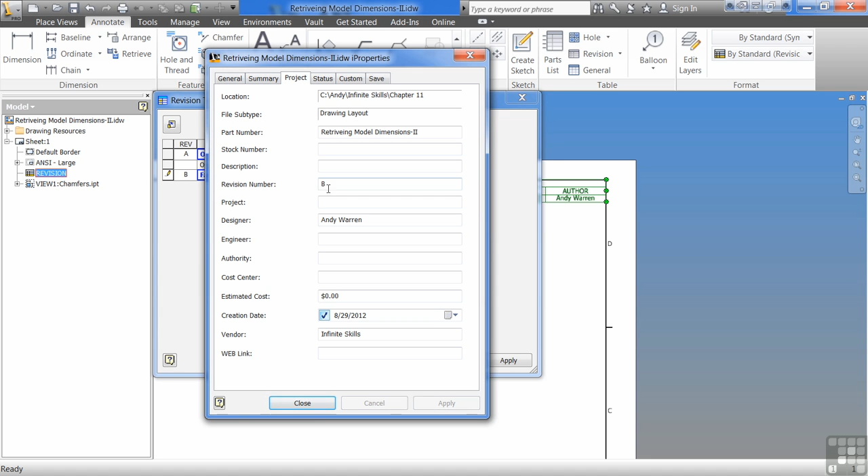iProperties would actually take me out to the iProperties, so I can see that revision B now is the active revision. So it's automatically updated that. If I come in here and add another row, and I hit iProperties, you'll notice that it's now revision C, because I keep changing it. Every time you add a row, it changes it.

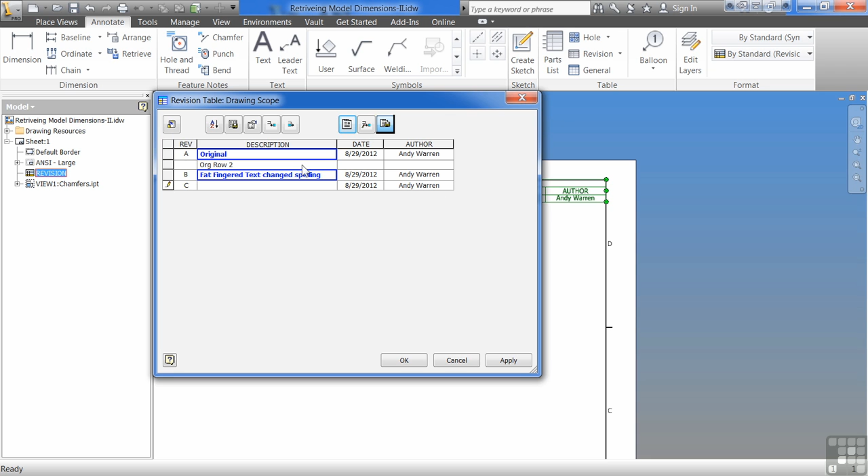You don't have to type text in there, but I highly encourage you, if you're making a revision, then that means you're changing something. So make a good revision there. I can choose if I want to add additional columns at this point, and it will not override my style. It'll just be on this particular drawing. Maybe I need to have engineering approval and management approval in this particular set or something like that. So we can go through and just have a revision special to this drawing. Hit OK. So now I have my revision table in there.

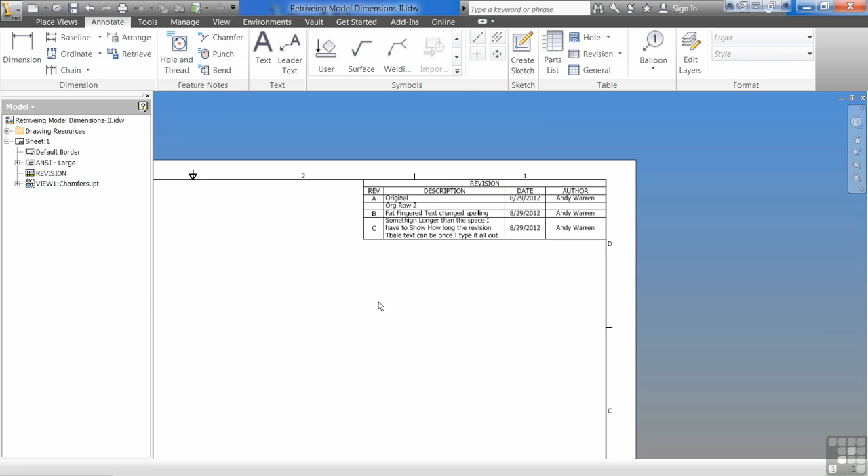If I go into the description column and I have a very long description, if I get really long-winded there, you can see that it will actually take and do word wrap. But let's say I didn't want a word wrap because it's getting into my part. What I can do is I can spread this out a little bit, make that longer. The longer I make it, the more room it's going to have. It will push this other stuff off my page. I can just grab my table, drag it back over, and it'll snap back in my corner.

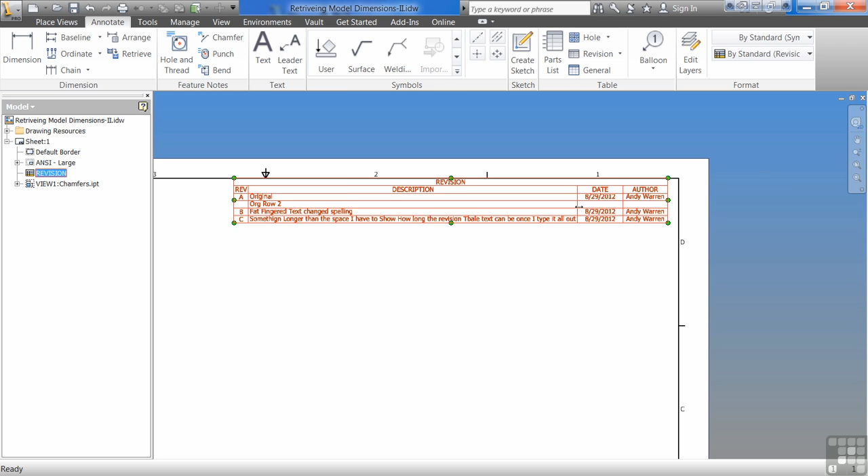I wanted to make my name a little bit shorter. If you want to make something shorter, you go from right to left. If you want to make something longer, you go from left to right. So I can push in there as tight as I want. I'm just trying to cram as much space in there as I can. So, that's just a little too tight. I can spread that back out. Or I can say, you know what? I don't care to have 2 rows of text, I just don't want to have 3.

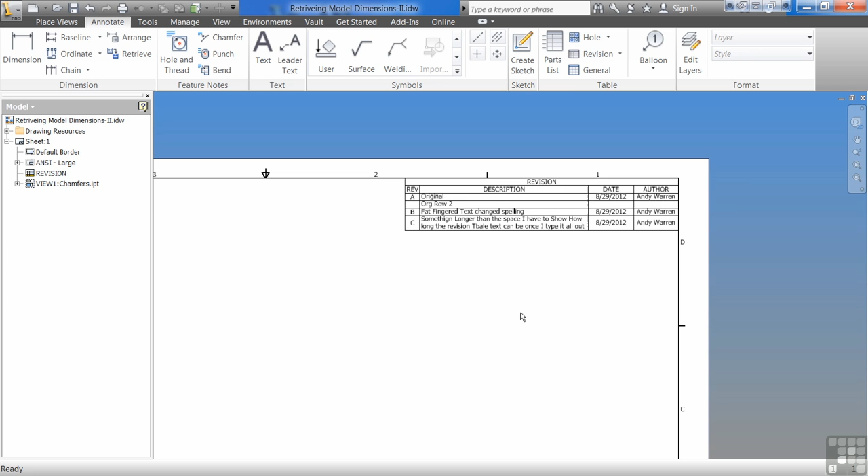So you can play with it and you can stretch it back and forth and you can force it to be the revision table that you want it to be. You can actually add these headers and descriptions and change the way they look, make them bold. But for the most part, this is a pretty standard revision table. If I do drag it down, I can snap it down here, or I can snap it over here beside it. The best way to move it is not to grab the lines like I just did there, but to actually grab the text. For whatever reason, I find if I grab the text, it's the easiest way to move it.

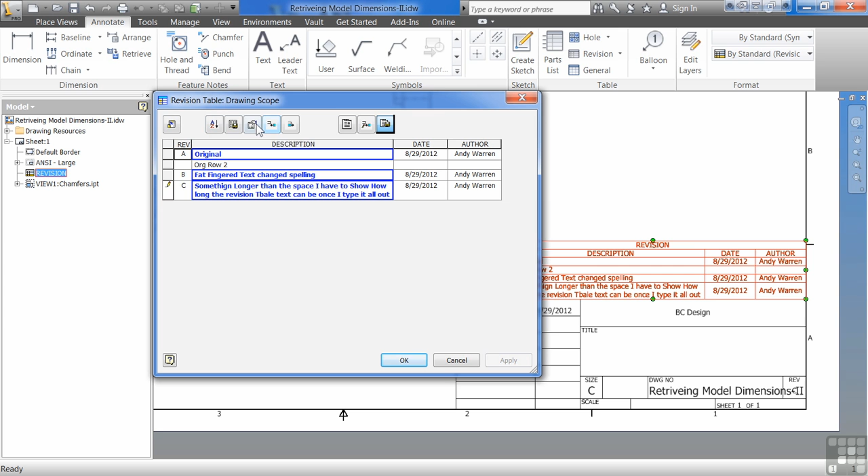If I move it down here and I say, just on this particular one, I can come in here and look at my actual table layout, and I could change it so it goes the other way. Okay. So basically now revisions at the bottom, it works its way up, so the one at the top is now the newest. It's however you want it to go, however you're used to.

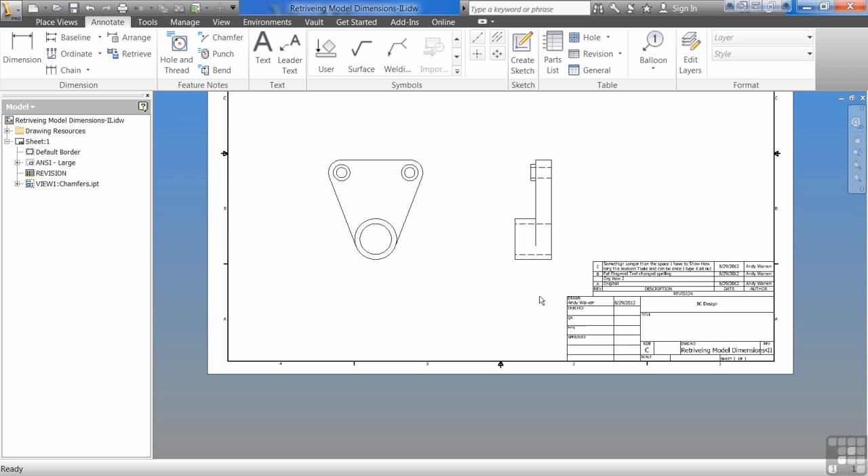Try to make it look like your office drawing standards. If your office really doesn't have any drawing standards, try to make it look like everybody else's. The easiest way to do it. You can play with it some, figure out how to get it to look the most usable for you. And then the next thing we'll look at is actually adding revision tags that associate back to this revision table.